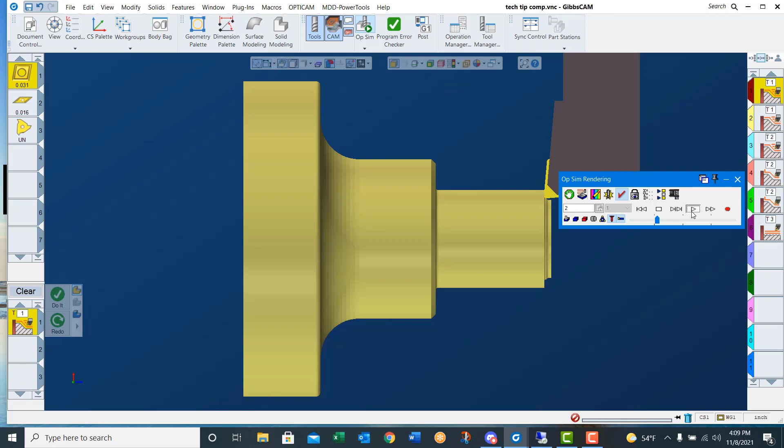In this month's Tech Tip, we will demonstrate how to use and save processes. Saved processes reduce the amount of time needed to program a part and allow you to save custom tools and tool holders along with information such as stickout length and comments. All speeds, feeds, and depths of cut will also be saved in the process. This makes for a more consistent look to your programs.

In this demonstration, we will create and save processes and use them to program a simple turned part. I've arranged my process by operation type. There are no limits as to how you arrange your list. You may choose to arrange them by tool number or any other criteria that works for your programming.

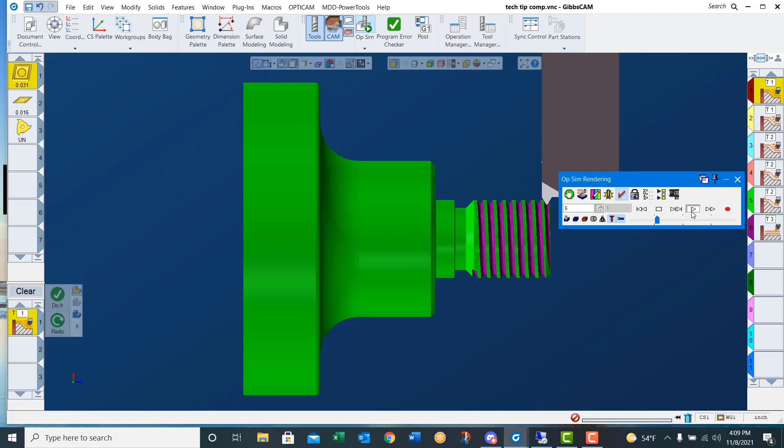Let's stop this simulation and take a look at my process list that I created on my desktop. You can see I've got lathe, turning, OD, 80 degree, rough. There is no face process in here. I purposely deleted it so that we can build it right now.

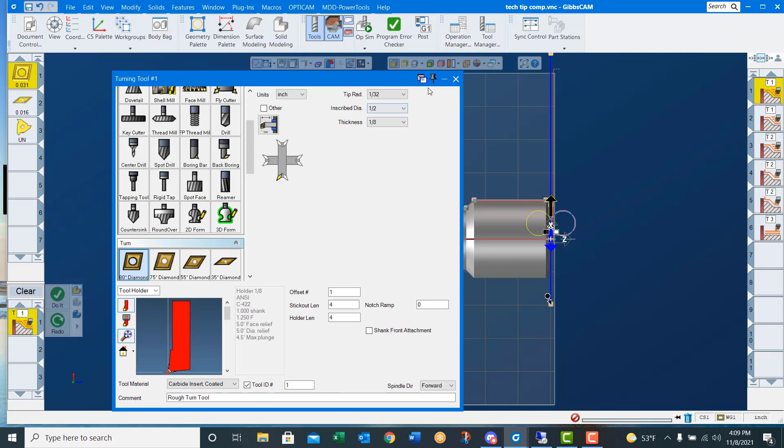So let's open up the project we were just simulating. You can see I've got the 80 degree tool built here. Here's my rough face. Once you've done the process, you can then save it as a process into a list.

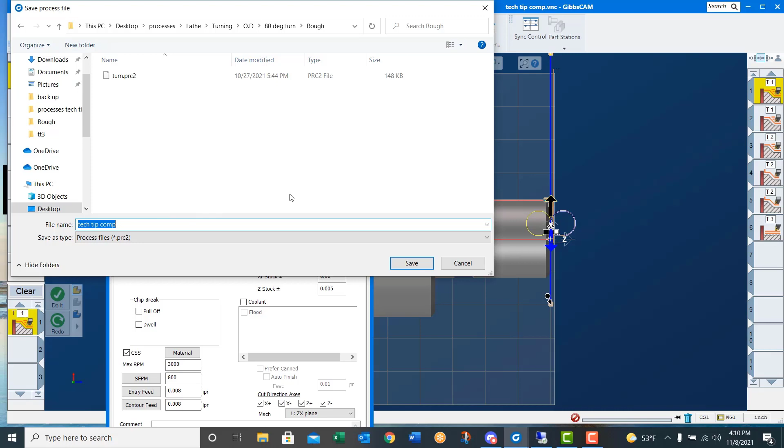So I just activated it. I'm going to right click and say Save Process List. We navigate to that folder I was just looking at: lathe, turning, OD, 80 degree, rough. You see I got a turn. We'll now put a rough face process in there. Face, enter, and we just saved it.

Now let's look at using all of these processes to turn this part. First thing you need to do is set the folder, which tells GibbsCAM where to go looking for our processes. In this case it's on the desktop processes, and all I've got to do is hit select folder.

Now when I right click and say load process: lathe, turning, OD, 80 degree turn, rough, face - you see it built the tool and built the process. All I need to do is set my markers and choose the correct direction of travel, and we should have the part rough faced. Say do it.

There we go. I used material only, so I don't need to be very careful about my marker placement.

We'll go right click, load, lathe, turning, OD, 80 degree rough, and turn. Now I need to set my markers appropriately again. We'll move our end feature down here, move the end point off of the part, and we'll say do it. I did not dive down into this thread relief area because when I saved that process, I purposely had no X minus checked.

So we'll go lathe, turning, OD, 35 degree. We're going to rough that thread relief out now. I also saved a process for that. You see it just built the 35 degree tool. We'll set our markers appropriately, using material only again, and say do it, and it roughs out the thread relief for us.

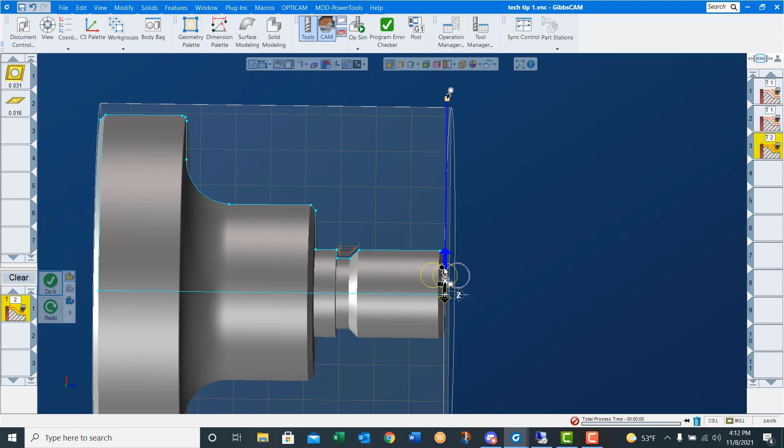Now we'll right click, load list, lathe, turning, OD, 35 degree, finish, face. Choose the end face, make sure to move our markers where they need to be, choose the direction of travel, correct side of the line, say do it. And we just finish faced the part.

We'll right click, load process, lathe, turning, OD, 35 degree, finish, turn. Once again we need to set our markers. That's all we need to do. Make sure to choose the correct direction of travel, correct side of the line, say do it, and it turns the part. You can see here I had no drag selected when I saved that process.

We've got one thing left to do here, and that's just to thread this part on the end. So threading, OD thread, imperial, 1 inch 8, and when I say do it, it builds the tool and threads the part based on the criteria I saved when I saved the process.

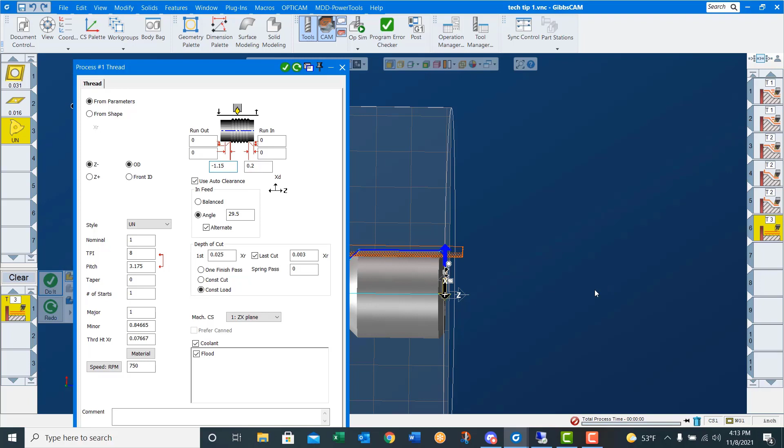So if we think that's a little too long, all we've got to do is open the process up. Now instead of going minus 1 inch 200, let's go minus 1 inch 150 and say redo. Now when we look, we went 1 inch 150 instead of 1 inch 200.

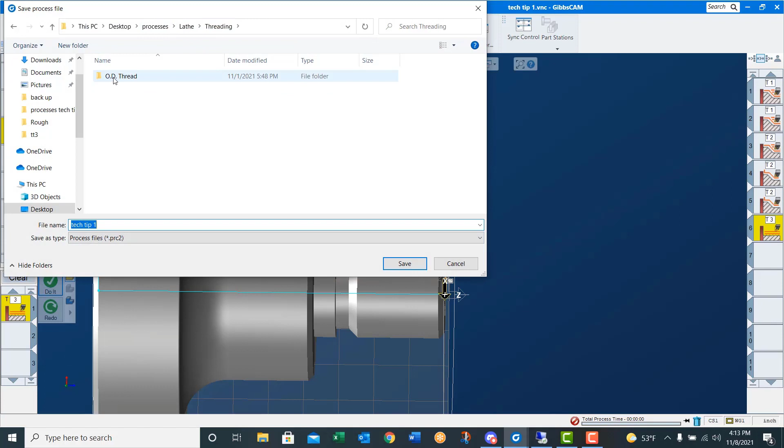Now if we want to overwrite our existing process, we've got the tool, we've got the process called up. We go right click, save process, drive into our process tree that we created. There's that O.D. Thread. If I just single click on it and say save, it asks me if I want to replace it - yes, I do. Now that process has been saved with the new depth of cut.

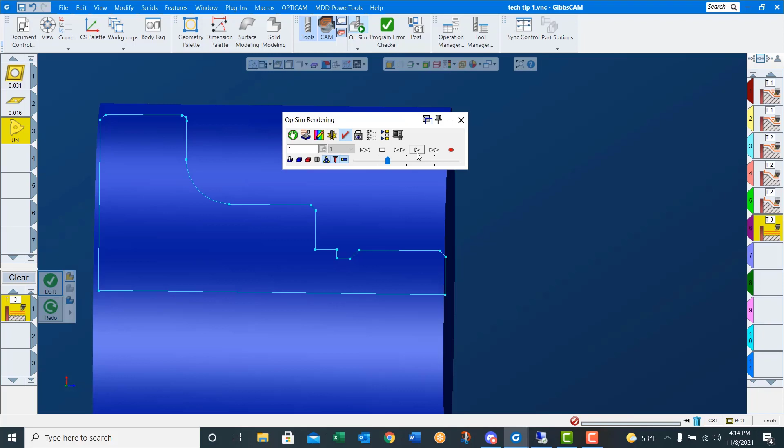Processes reduce the amount of time needed for programming in GibbsCAM. I highly recommend you contact your reseller if you have questions about it. Thank you for watching this month's GibbsCAM Tech Tip, and have a nice day.